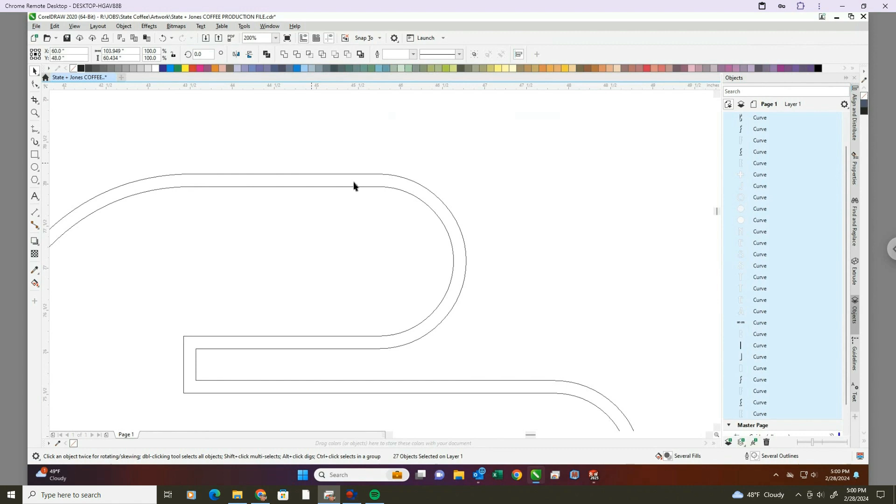Alright, I think the biggest takeaway here is to make sure you export a line that represents trim cap. I'll show you why in a minute. Let's turn this to a wireframe view. See what I mean? We got a 150 outline that represents trim cap. Over here we've got 150 that represents trim cap.

We got the vinyl represented that'll be on the face of the sign. And of course I could show you how I cleaned up all that vector art maybe in another video, because believe me, when it came from the customer it was not clean. Now this is a little bit iffy right here, but I'm not going to worry about it. That's for the people applying the vinyl to decide.

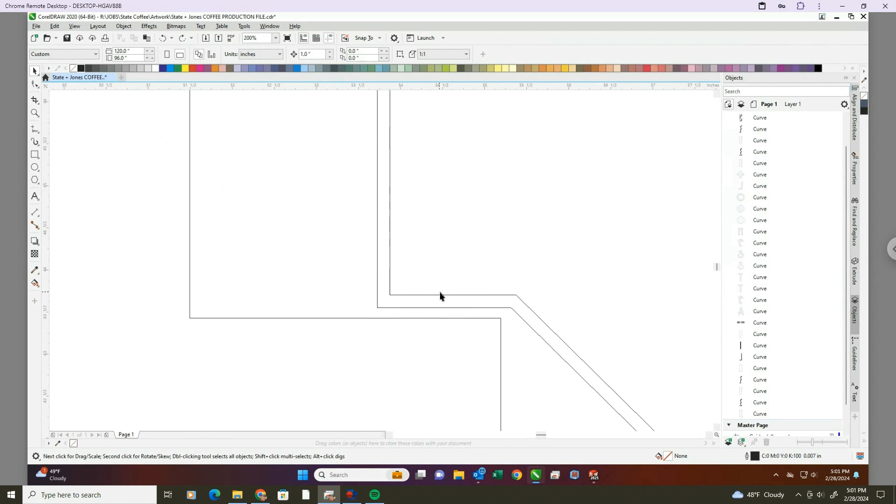Be an easy fix. Okay, let's head on over to SolidWorks. Alright, I'm trying to make shorter, faster tip videos. I know some of you don't want to watch an hour-long video, but I'm pretty sure others would. But I'm working on shorter.

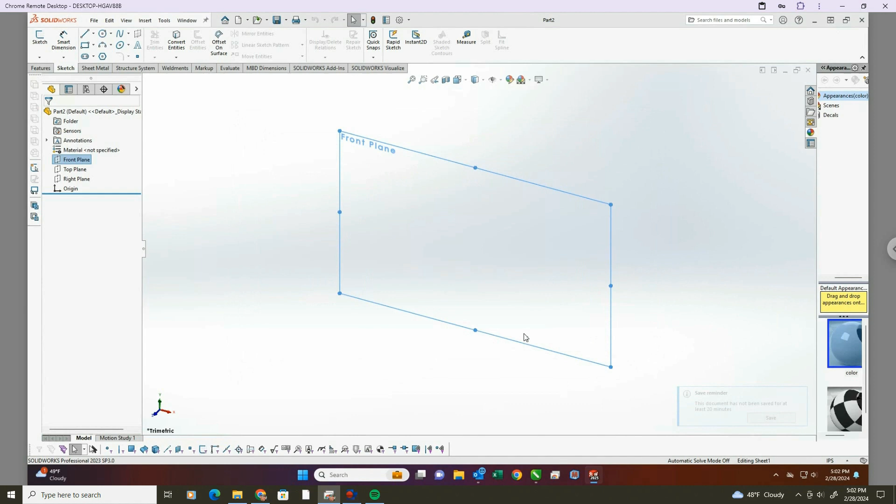So let's go File, New Part. Take the front plane, insert the DXF, go find the file. There we go, open it. I always uncheck import as a reference. In this step, don't even worry about it, just say finished. Alright, there it is, looking good.

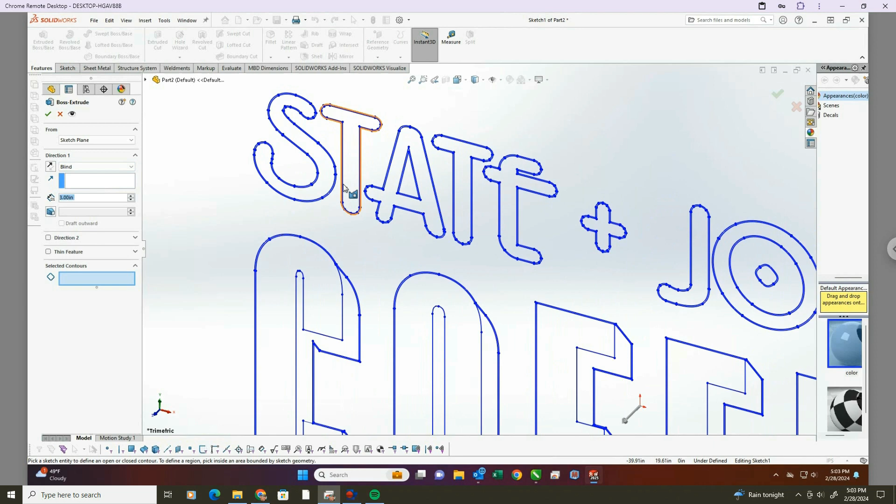So we're about to have a bunch of fun. Okay, first thing I want to do is extrude my channel letters 3 inches. Enter 3, don't even have to worry, just hit enter, 3 inches. I'm going blind. Now, the thing you want to do is pick the right line to extrude.

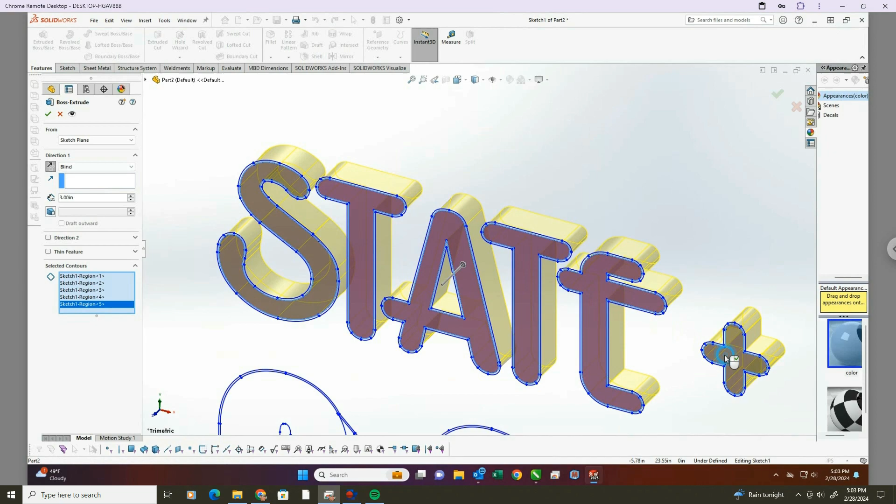Okay, so we're trying to extrude not the trim cap, but the letter, and we want to go the other way, away from us. So switch directions here. There's that one, there's that one, there's that one, that one, that one - these are your selected contours. That one, that one, that one, that one, that one, that one.

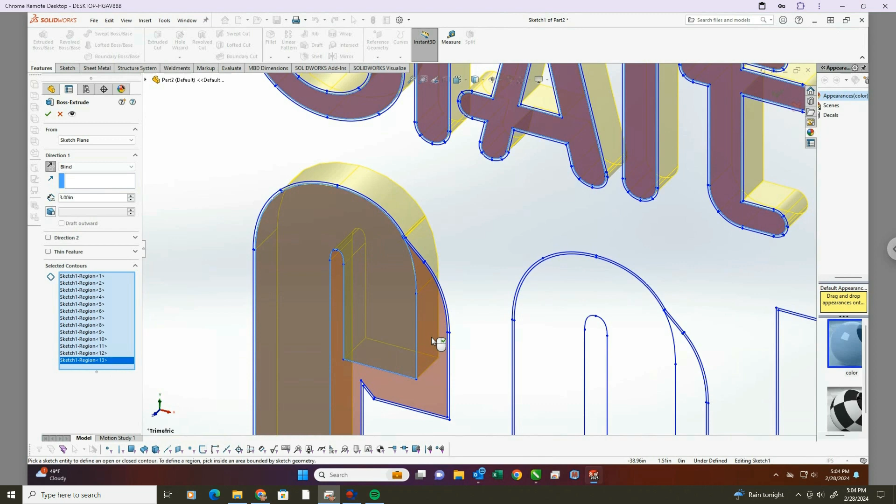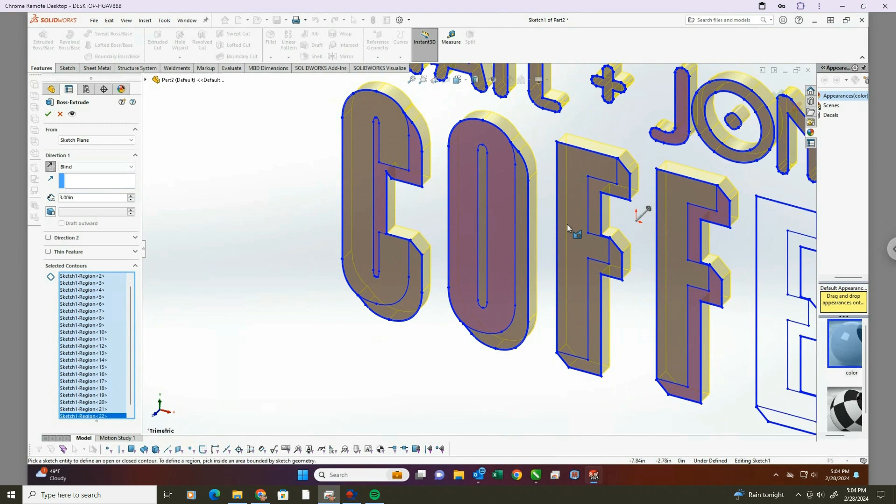Now, might as well get down here and see what we can do. I think it'd be that and that, yeah, and that, that. I'm going to go with even that, the inside, and that'll become clearer in a second. That, that, that, that, that, and that. Say OK. There we go, click off of it. We've got our metal letter forms. Super fun, right? Super easy.

Okay, let's do another extrude. This will be the trim cap. And it's asking us to pick a plane, a planar face, or an existing sketch. Of course, we're going to pick the same sketch. And we're not going to merge the result. We're going to take off in one direction for 1 inch.

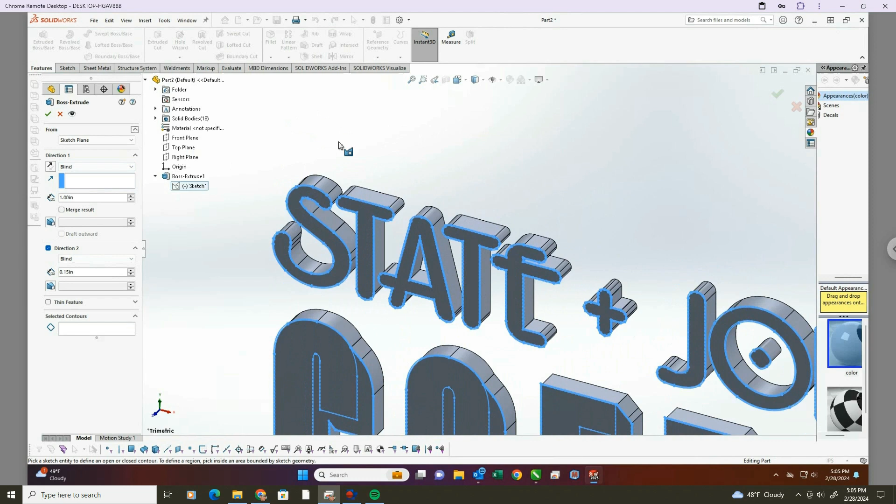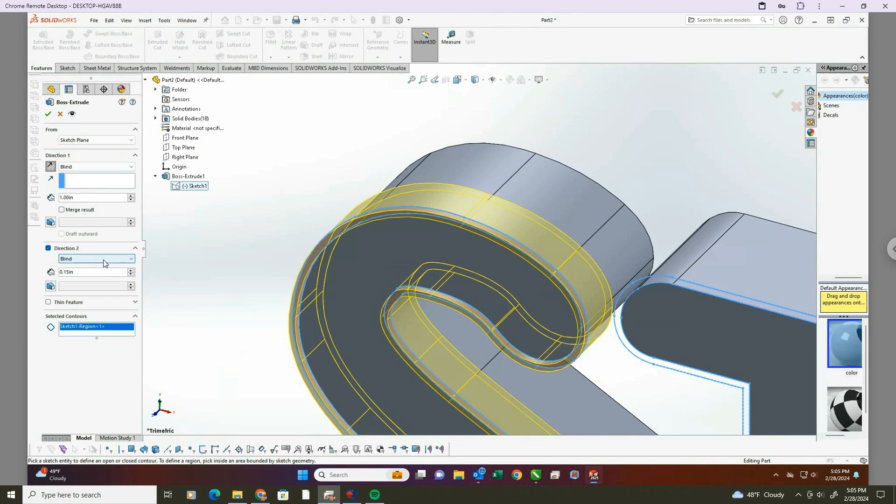We're also going to have a second direction on this because the trim cap sticks up above the surface of the face a little bit, and we want it to look like real trim cap when we're done. So let's go 0.15. Now we have it going in 2 directions. Hopefully, even though SolidWorks might pick the wrong direction by default, we can change it. So now we're after what represents the trim cap right there. I can tell you right away it's going the wrong direction, we want to switch that. That makes the first blind direction go away from us for 1 inch and the second one come towards us for 0.15. When we're done, it's going to look like real trim cap.

Okay, now we just go pick all the trim cap. This was the reason for the way we exported out of Corel, knowing you have to have these lines that represent the trim cap.

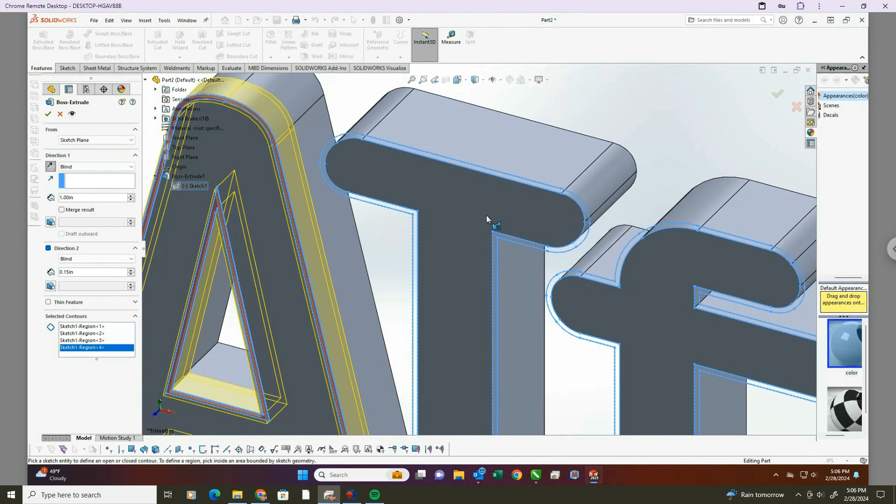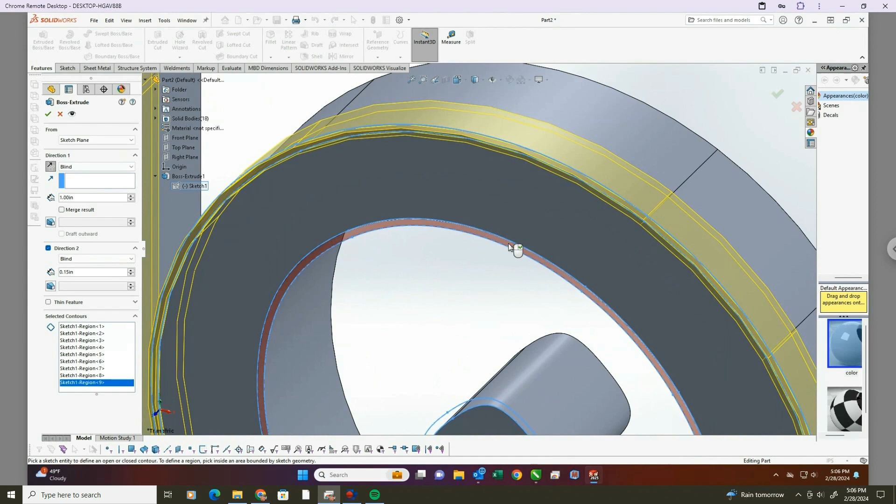There we go, there we go. Oh, we want to get the inside one. There it is, we want to get this little dot thing. Up, see? Messed up, but I can just click it again. You got to wait till it's filled in red like that, you see? Can't just select the edge, it gets confused what you're trying to accomplish. But you get used to it.

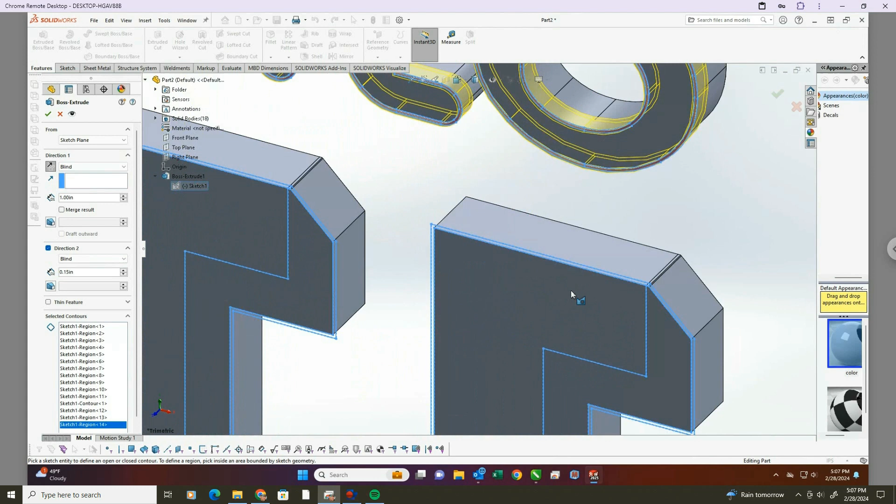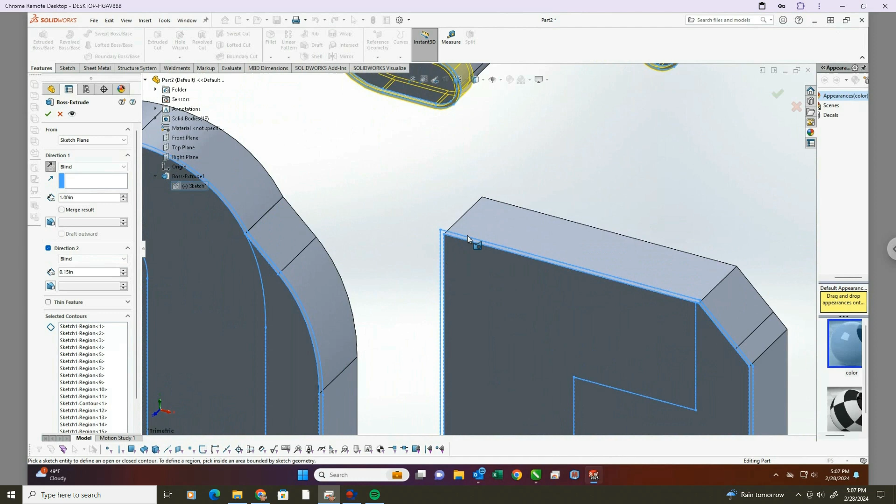Okay, trim cap here. Got to find it, see, it'll wake up in a second. There we go, right there. See it? Over here, same thing, right there. Over here, same thing. Over here. There it is. Over here. There. And on the C. Great, okay, and say OK.

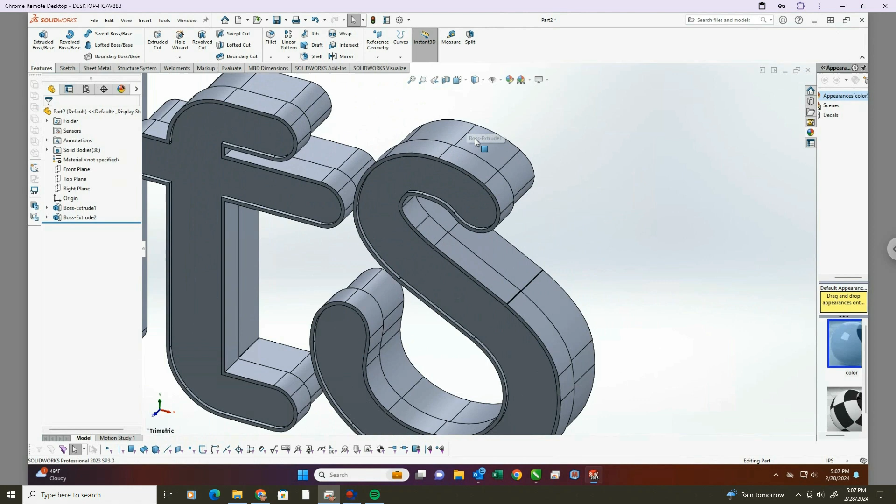Now look at what we got. We got channel letters with trim cap. Yes, gonna look nice when we take it into Visualize.

Now, if you want to have some fun, you can right click on Boss Extrude, change the color of the Boss Extrude to some color representing the letters. Whatever color you want them to be, let's go red. If you want to get in the advanced here and illuminate them a little, it just kind of makes them pop. It's all going to get changed when we get to Visualize, but say okay.

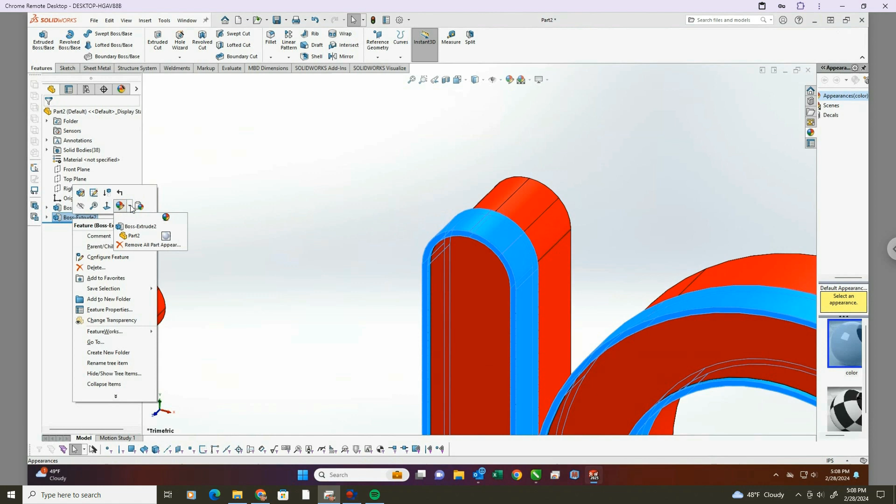Now you got red letters and some kind of gray default colored trim cap, so you could right click the boss extrude that represents trim cap and change the color of it, and I'd like to have white trim cap, put a little pop illumination on it. There we go, now you can tell the difference between them.

Now you might be asking yourself, where's the faces? That's a good question. All we got to do there is tell it we want to color only the face white with some illuminated pop.

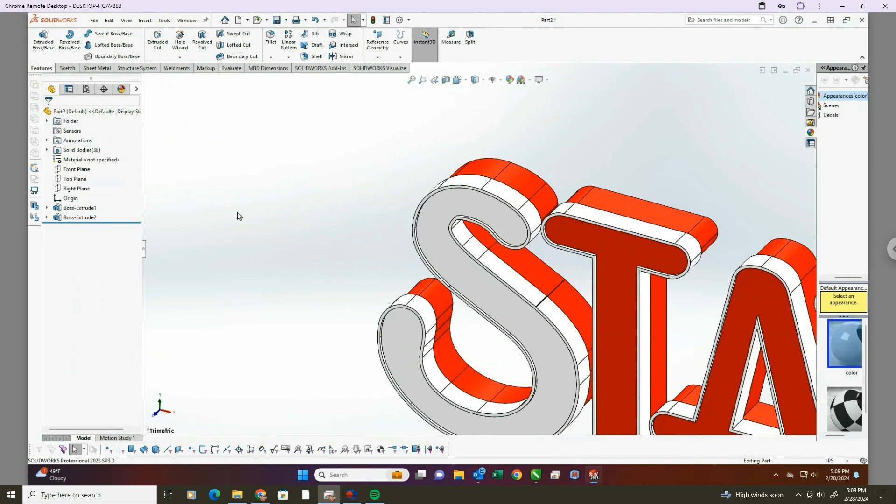41 is my favorite number. Thank you very much. Close enough to 41, there we go. 42, 1, there we go. Now look at that, white face, white trim cap, red channel letter.

Starting to look good. Now an easy way to copy this is select the face and hold down Control-Shift-C. Then come over here, grab this, Control-Shift-V, tell it you want only the face. Do it again, but this time Control-Shift-V.

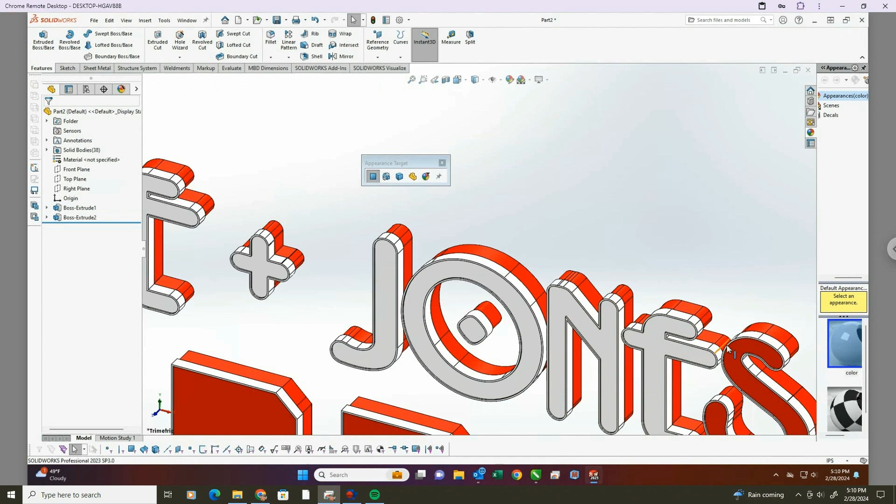We're going to lock the little fly out, and now everything we touch is going to know that we want the face colored. Control-Shift-V. Because it's willing to color the face, the extrusion, which is the feature, the body, the part, we just want the face. Control-Shift-V. And because we got the fly out pinned here, we don't have to choose each time. Control-Shift-V. I'm sure there's also a faster way to select all the faces, but I don't care, my fingers need exercise.

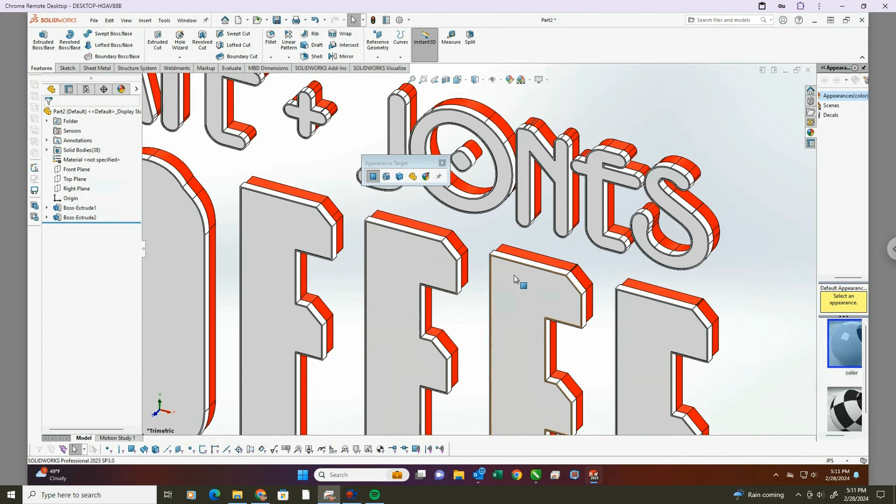Let's do the same thing with the coffee faces. Control-Shift-V, Control-Shift-V, Control-Shift-V. Now you can close out your pop-out, fly-out window. Nice, huh? Okay, let's go ahead and save it.

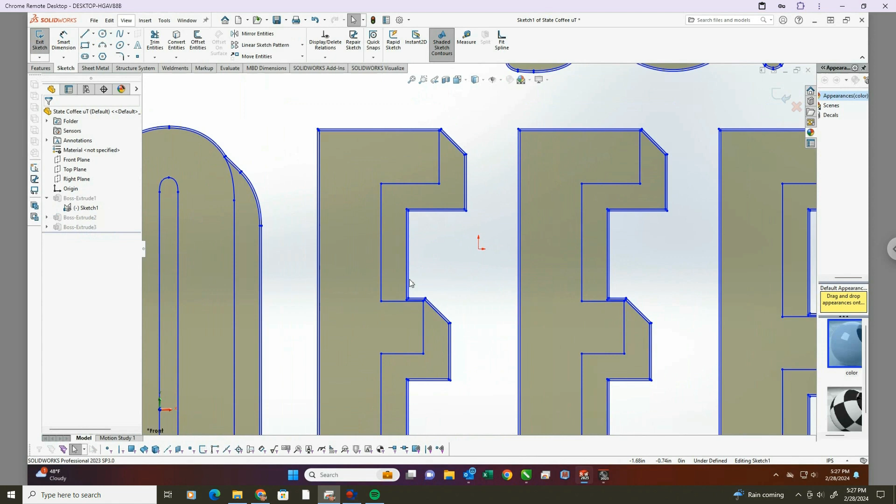I can just go to the sketch, edit the sketch, get over here, and do something about it. So what I'm going to do is move this line over to where I think it's going to look better. There's several ways to move this line, but that's good enough for me.

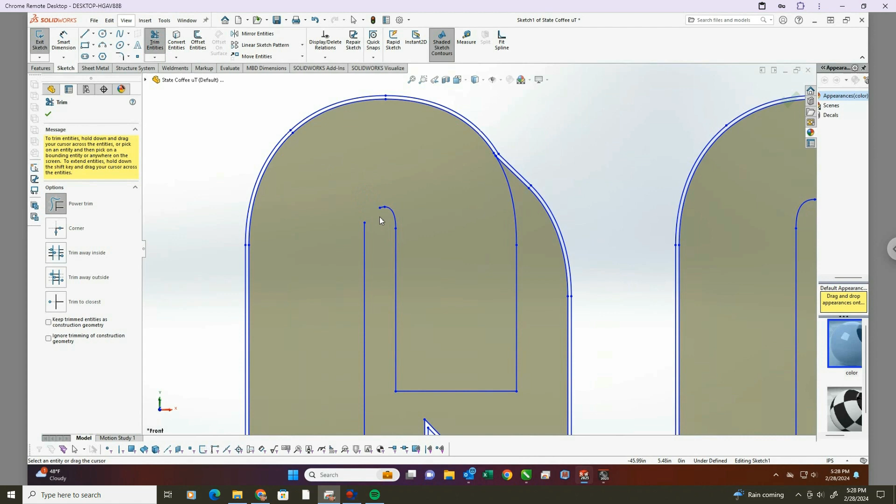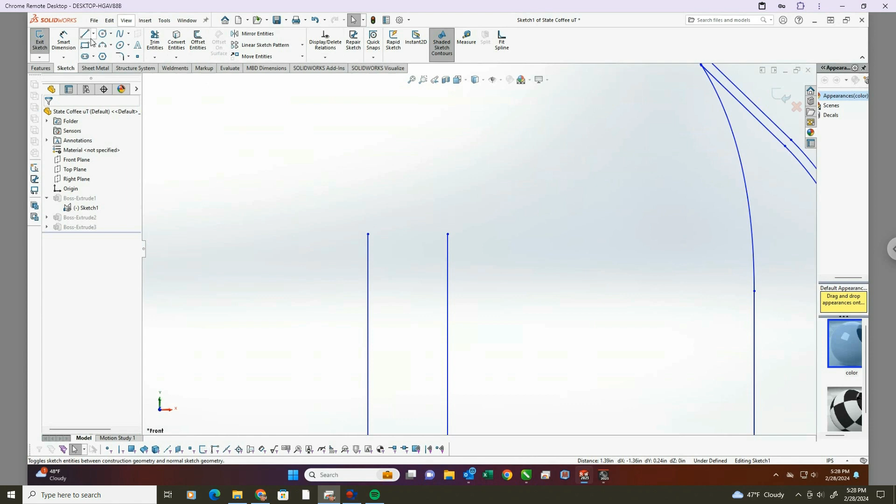And then I'm going to trim this, and this - probably should zoom in closer. Then I'm going to escape out of the trim tool, take this into this sketch segment, hold down shift and get that into that sketch, and make them horizontal. Then I'm going to escape out of that. I'll get my drawing tool and take off with a line, but go back and touch it again so it becomes a radius, then escape out of that.

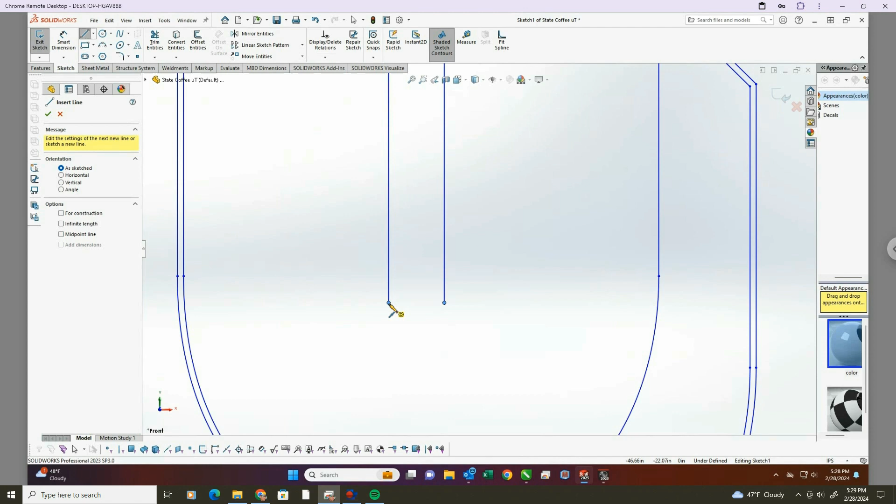Then I'm going to go down here, take my trim tool, trim all this - hopefully you know how to work the trim tool. Escape out, take the end of that sketch segment, hold down shift, grab that one, make them horizontal, get my line tool, head away from here, go back and touch it again, turn it into a radius or an arc, escape out.

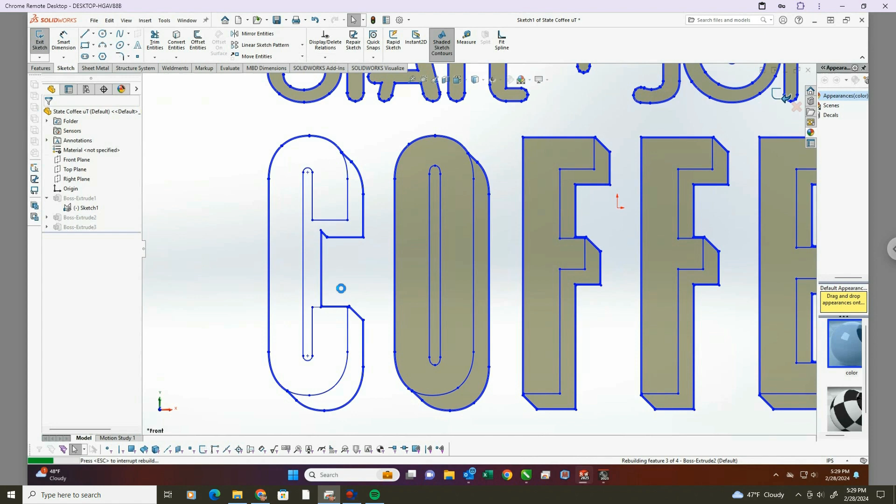There. Now I just did a vast improvement, and all I got to do is jump out of my edit sketch, and oh, it looks a lot better. Guess what? It's going to look better in the rendering too. Now I hit save so it knows I want to keep my change, and I go back to visualize.

And it's going to ask me blah blah blah has been modified - do you want to re-import it? If I say yes, I might be starting over, but I'm going to say yes. It always does that, it kicks back over to SolidWorks. Don't ask me why, but you see, we did lose certain things.

Like, we can put them back real quick. We can put that back real quick. We can mess around with the rotation of the highlights and yada yada. But what else did we lose? I don't think we lost any of our colors - we've got emissive white on the face, we've got matte black, and we've got some sort of plasticky trim cap color, which just for fun, let's monkey with. Let's monkey with both these colors - I don't want plastic, I want paint.

Paint. There we go. Do you see what it did to it? It kind of took all that gloss off. Even though it has a clear coat, I can reduce the clear coat.